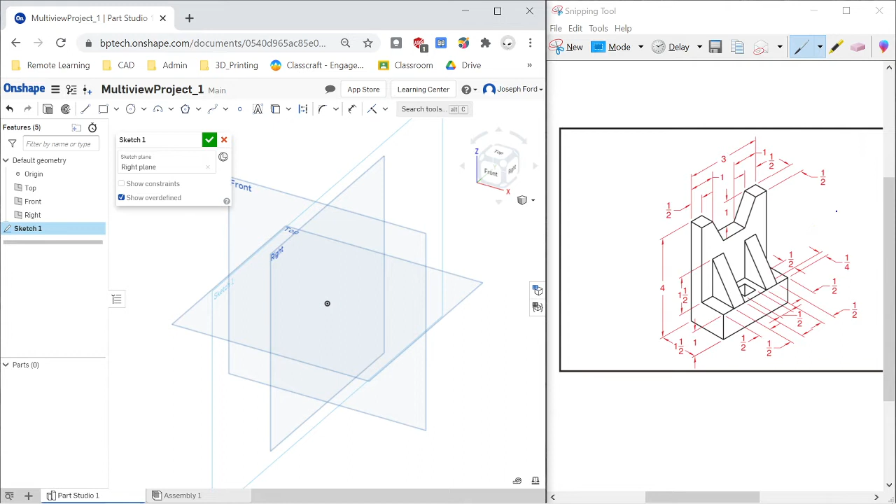So to start, I'm going to create a sketch on the right side, and I've decided that this over here is going to be my right side. So while I create this, I'm going to use the origin as the corner. So I'm going to create my L shape, and I just need to get it about, because I'm going to dimension it after.

Quickly, just to check your units, I'm going to go in here, look in workspace units, and I am in inch, and that's what I want to be in. Go back into your sketch. I'm going to dimension this out. So dimension, this is going to be half an inch, 0.5. This is going to be 4 inches. This is going to be 1.5 inches. This is going to be 1 inch. And that looks good.

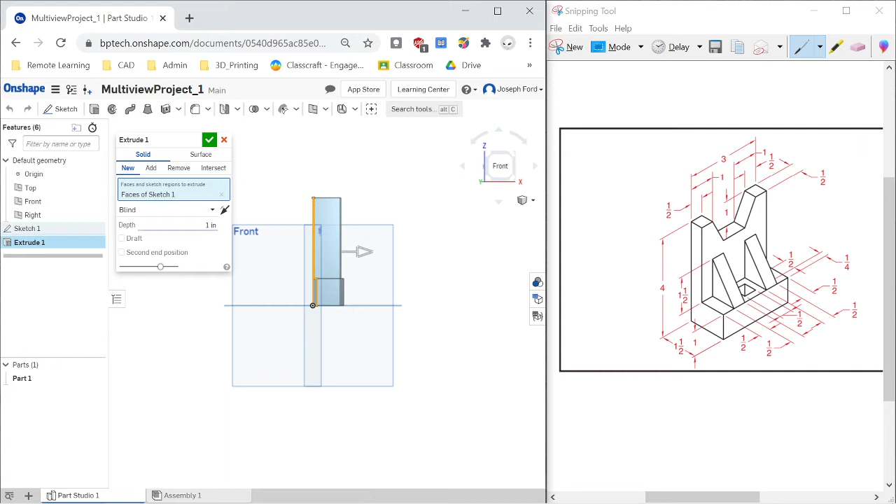I'll just move this out here. So it's all black, meaning that it's a fully defined shape. So now I can extrude it. So I'm going to extrude my shape, and I'm going to take a look around, make sure I'm extruding in the right direction. So if this is the right side over here, I need to actually extrude it to the left. If I'm drawing from the right, I need to extrude to the left. So it's gonna be new, and the direction is going to go to the left, and that is going to be a total of 3 inches.

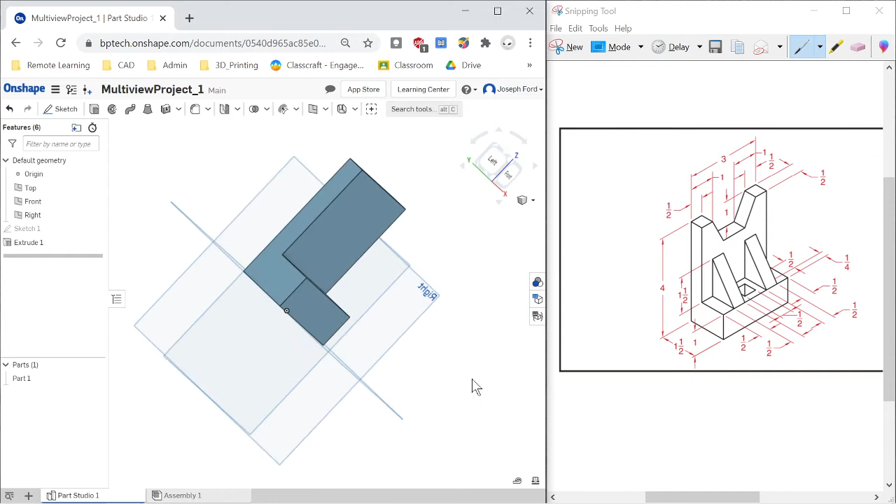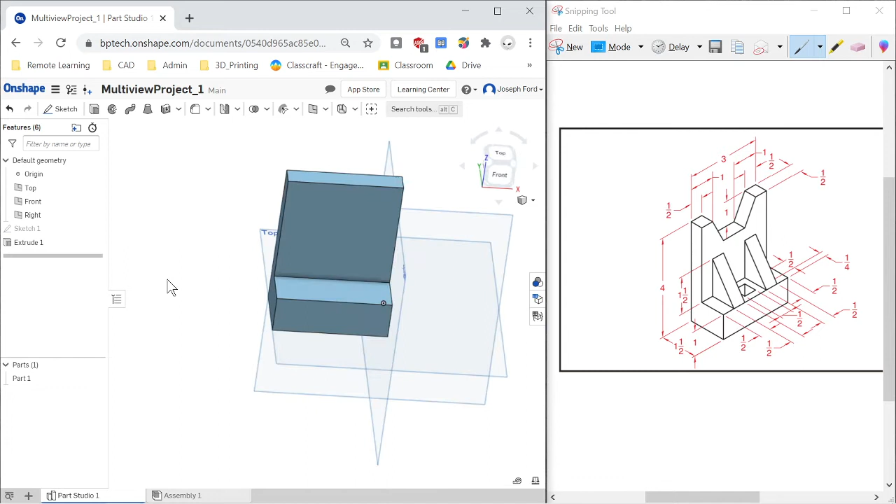And check it off, and I have my L shape, and now I'm going to create a cut here. I'm going to create 2 triangular pieces here and here, and then I'm going to also create a square cut right in the center. So it doesn't really matter where you want to start. I'll start from the square. I'll create the square cut,

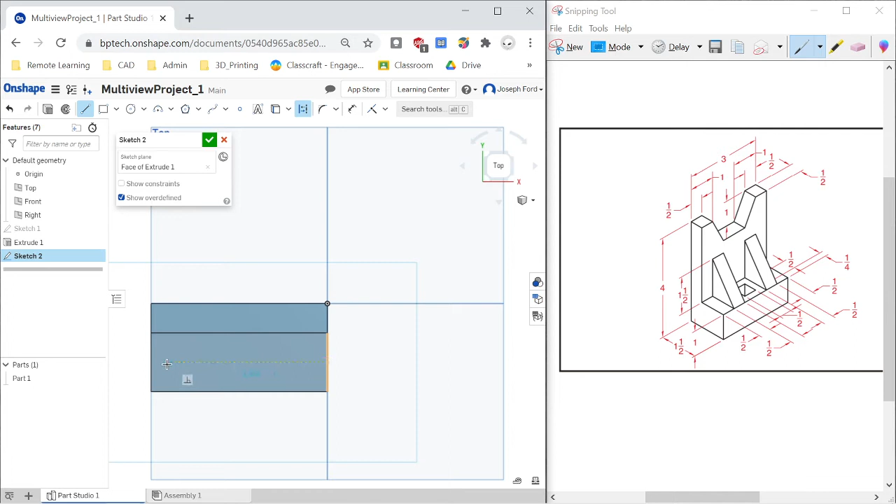and again I'm just going to go into sketch. I'm going to select where I'm going to make the cut, which is right here, and then I'm going to make some reference geometry. These are going to be construction lines, so L for line and Q for construction. So that'll be the center line for my square. I'm going to do a center point rectangle, find that middle distance,

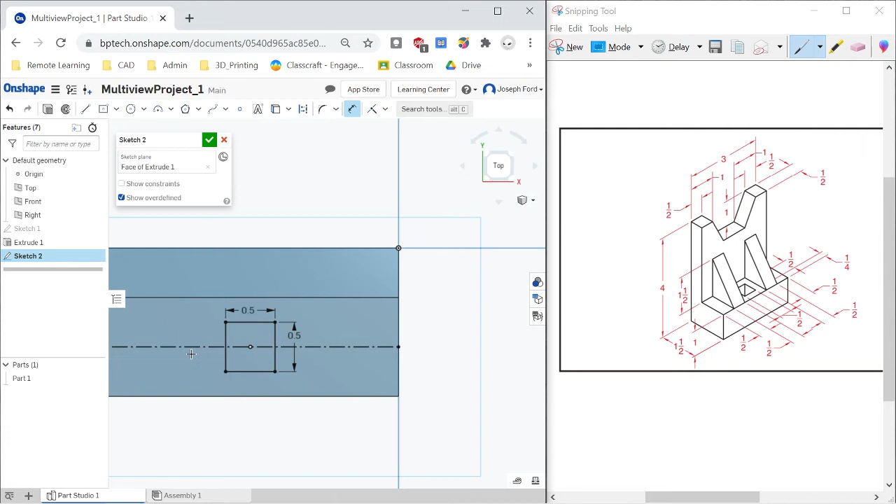dimension out, and let's take a look at how thick. So it looks like it's a 1/2 inch, and it looks square, and I'm going to assume that it's square because, oh, actually yes, over here it says it's a 1/2 inch too, so it is in fact square. So 0.5 and another 0.5, and then extrude, remove, and then I can just through all. So that's the first step. I got my square hole. Now I am going to create this cut here.

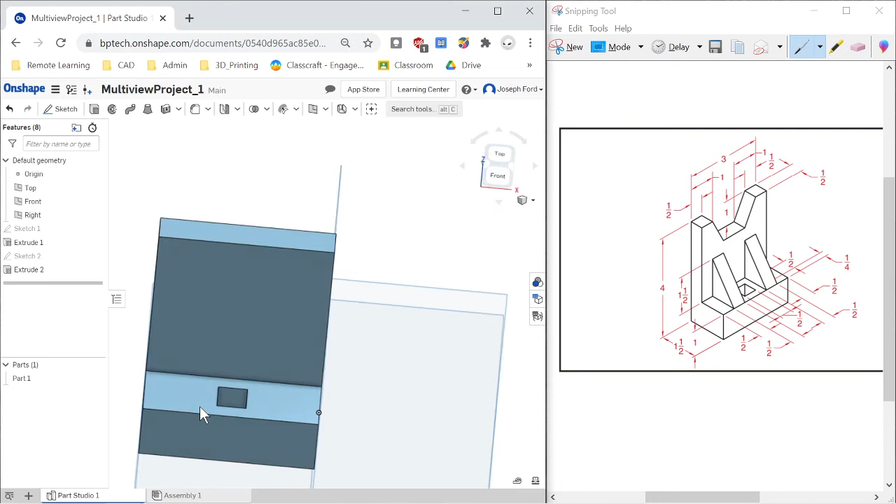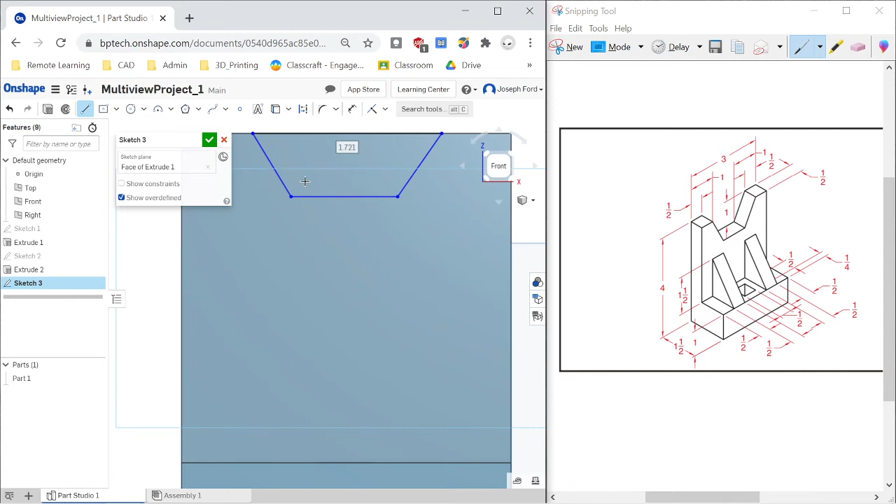So if I look in the front, I'm going to create another sketch on here. So sketch here, and I'm just going to kind of draw in this part here, kind of freehand it. Go down, make that horizontal, and then go back up, and then connect the dots. So now I'm going to put in these dimensions. So D for dimension, and this is going to be 1 inch.

The top portion, let's see. What is the top portion? Looks like it's a 1/2 on each side. So if it's a 1/2 here, a 1/2 there, this has to be 2. From this point to here is going to be 1.

So I know that this is in the middle. From here to here is going to be 0.5. From here to here it's going to be 0.5. Oh, I don't need that one. That'll make it dimension driven because I already did it there. Okay, so I believe that's all that we need to do.

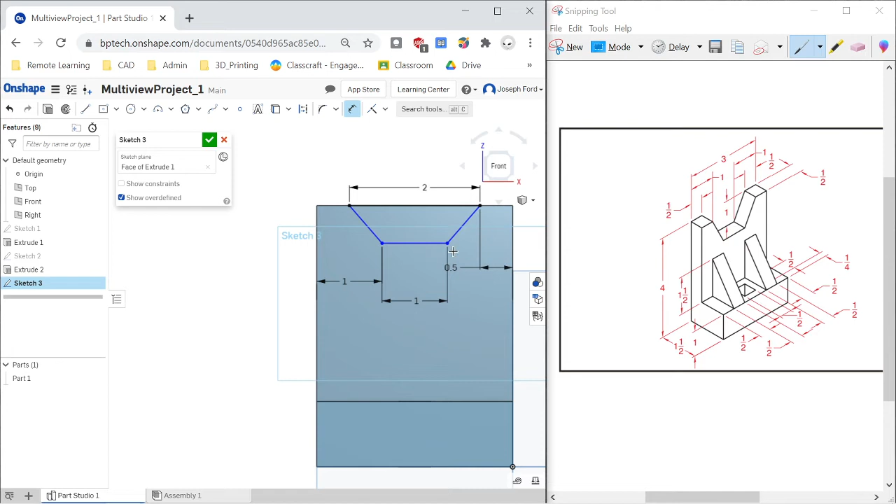So now once you have this, we can go ahead and cut it out. So we're going to remove, and again I'm going to just do the through all, check it off. It's always good habit just to check to make sure I have the correct lengths.

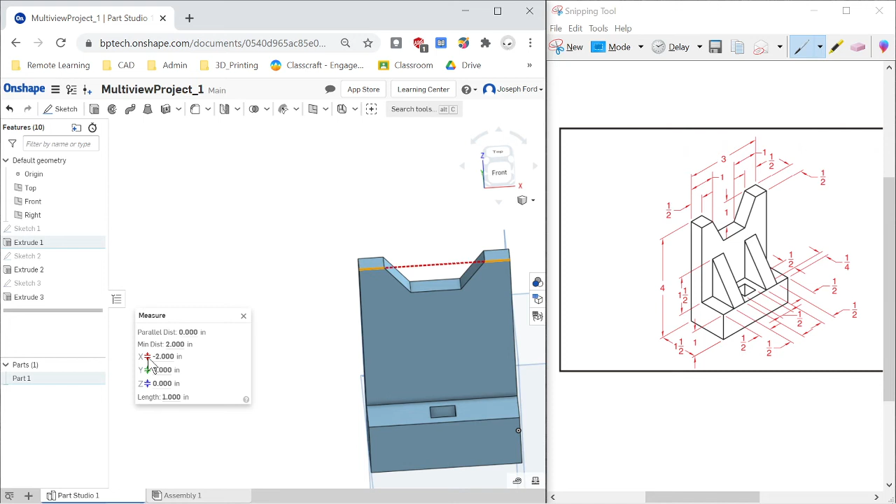So total length is 1, these two parts. Distance away from each other's 2, which is in here. So yeah, that looks good. And maybe I can take another measure here, make sure that's 1. Okay, so we're good. That looks good.

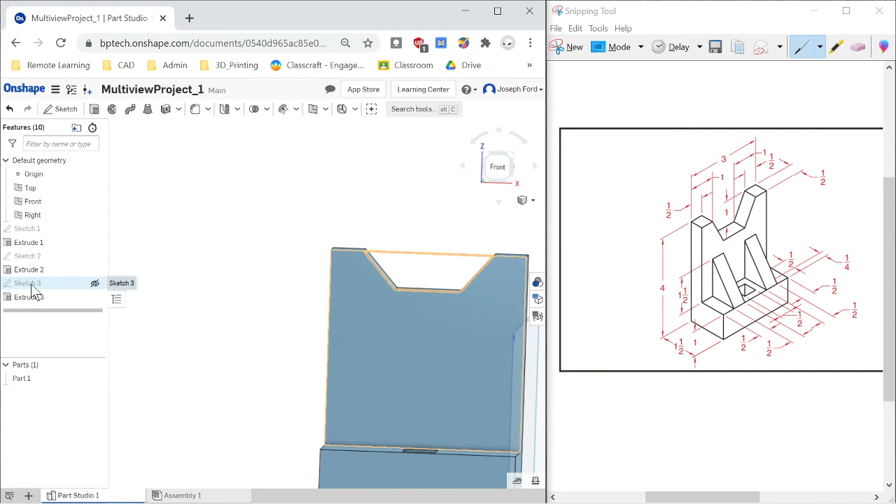Okay, I actually did not do the depth. So let's go back into here and make sure that our depth is correct. So depth from here to here. Aha, and that's why it looks a little funky. That needs to be 1 inch as well. So I'm going to type in 1, and it's going to make it a much deeper cut, which looks much more like what's viewed here. So very good.

We don't really need these planes right now. So you can click on P to get rid of them if they're in your way. But I don't mind them there for reference. So now the next thing we're going to have to do is extrude a couple triangles. And the triangle starts 1/2 inch in.

One of the legs is 1.5 inch. The other leg just goes the complete distance of the top portion of the L, so it's going to go 1 inch this leg, and then 1.5 inches that leg, and then you can just connect the hypotenuse, extrude it out 1/2 inch.

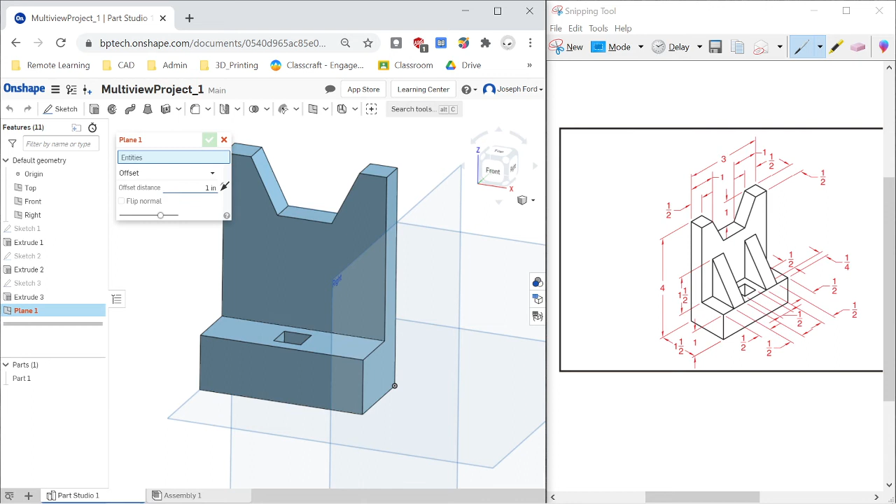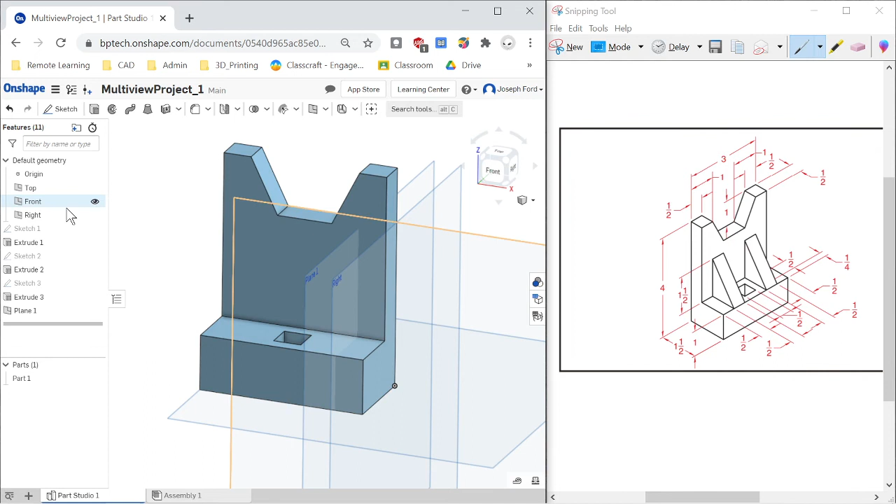So this plane that I'm going to create is going to be 1/2 inch offset from the right plane, so 0.5, and it's going to offset in the left direction. Check that off. Now I have this plane here.

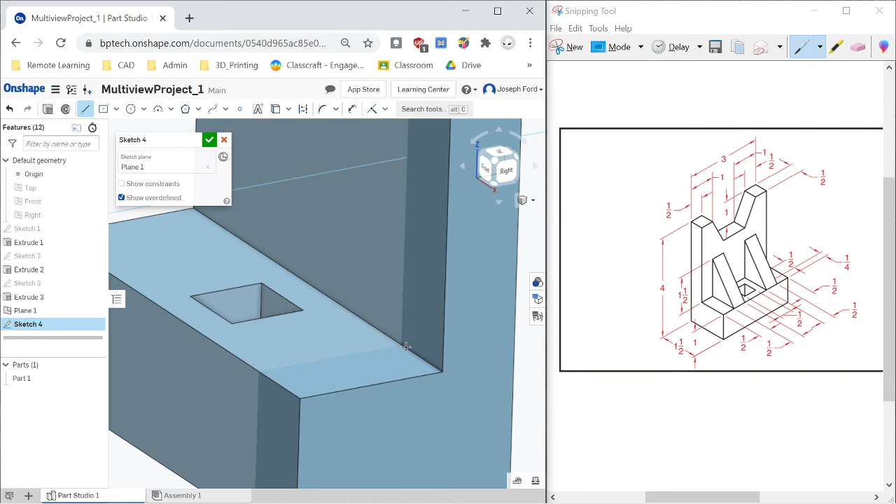I'm going to create a sketch on the plane, and I'm going to convert some entities onto that plane. So select this and then convert entities. What that does is it takes all these entities and just shifts it over to the plane that you're drawing on. The next thing I'm going to do is create my triangle starting at that point, and just come up here,

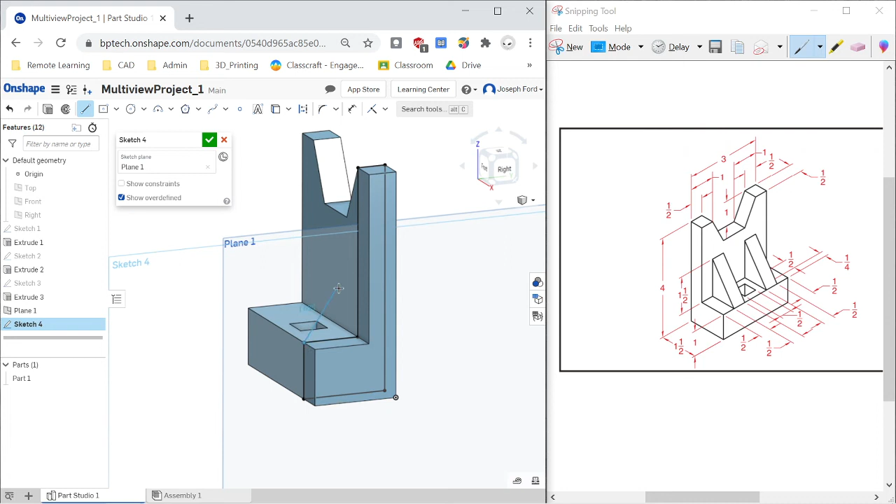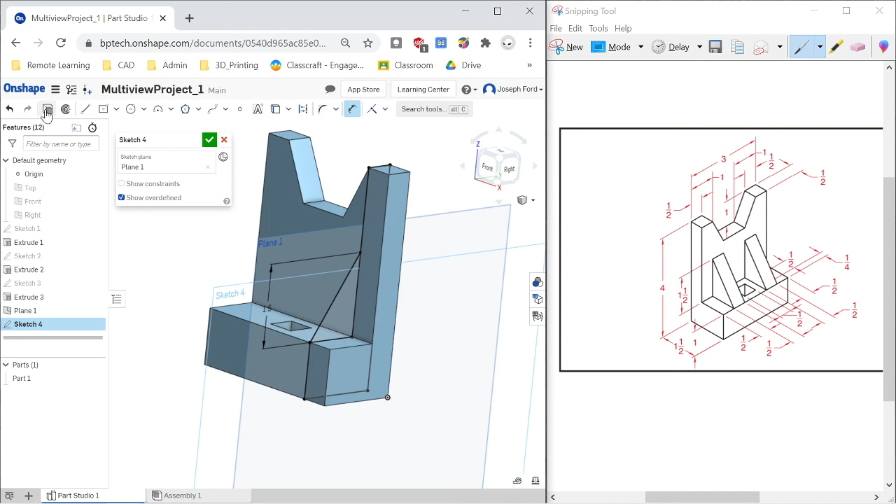and then I can dimension it. So from this point to here needs to be my 1.5. So I have that as 1.5. I'm going to extrude not the entire face, but just this portion. And I'm going to extrude that in the left direction, and it is a 1/2 inch. Check it off. So now I have my first triangle.

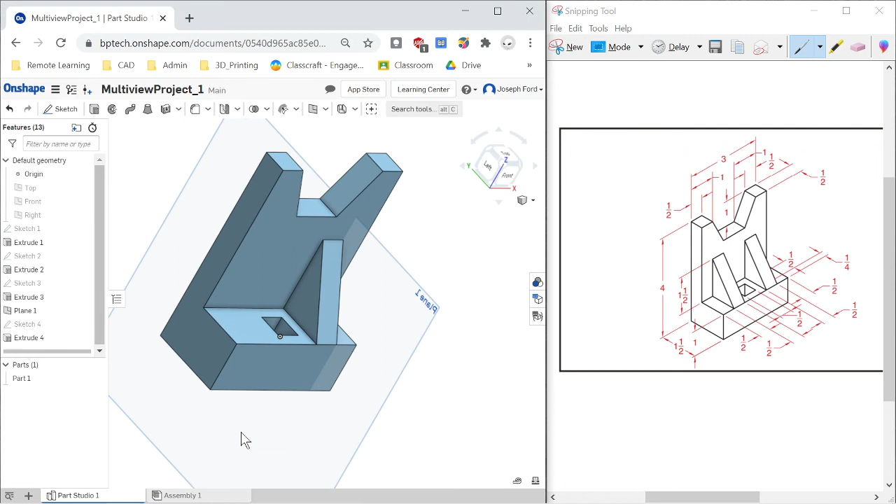I could definitely do the mirror feature. So rather than have to go through all of building the triangle again, I'm just going to mirror it. And to do that, I'm going to get my planes back. I'm going to create another plane, and it won't be an offset, but it will be a point plane. So I chose my right plane, I chose the midpoint of my object, check it off.

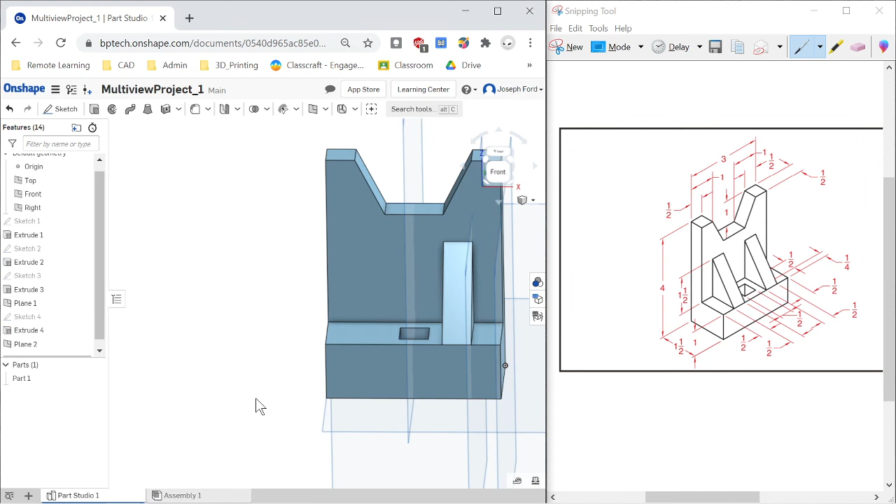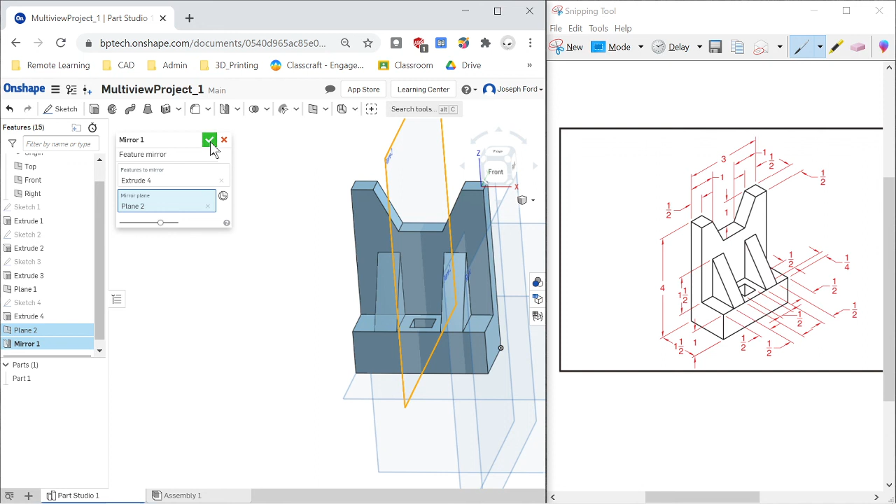Now I have the plane that I can mirror this feature from. So I'm going to select mirror, part, entities to mirror, and it's going to be a feature mirror, and it's this feature that I want to mirror. The plane I want to mirror is this plane here, and I'm going to check it off. And I have my triangle mirrored.

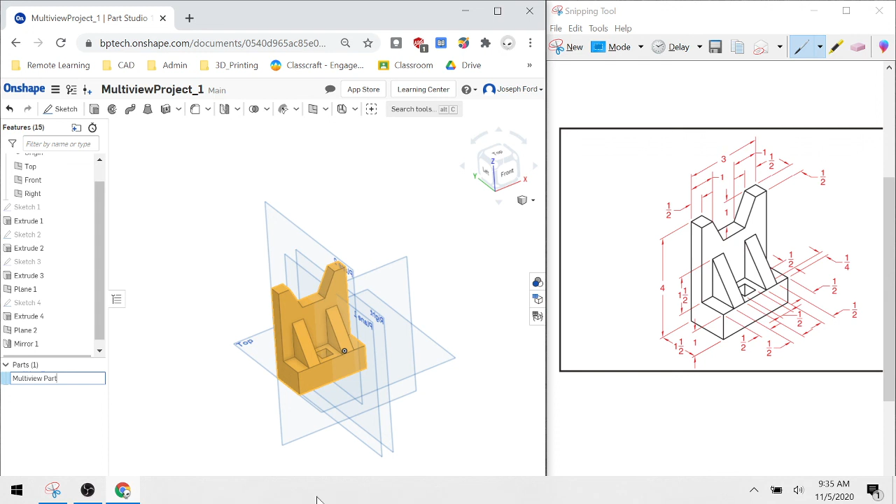So this is part 1 of this project video, and I have my complete setup. I am going to rename my part to multi-view part, and I'm going to assign a material to it. So right click, assign material, and this might be different depending on my requirement of what you guys are going to assign. Type in aluminum, check it off.

So now it's an aluminum part, and I can check out the mass properties, which I want you guys to do. So click on this little scale feature, and then select your part, and the mass is going to be 0.854 pounds. If you hover over it, you can get a more exact measure. Goes out 7 places, but the 0.854 is fine.

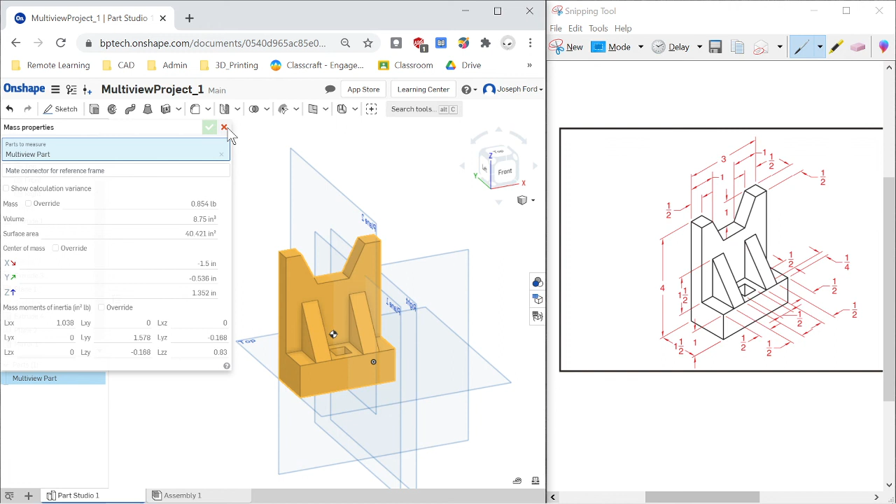Take a screenshot of that mass property and attach it to your assignment, and you should be good. So this is the part. The next video I'm going to go over how to make the drawing of this part.